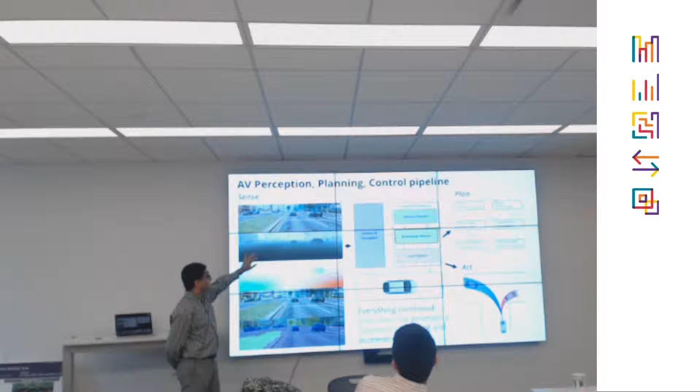If you look at how these autonomous vehicles actually work, they have sensors, and they go through this sense, plan, act loop about 20 times per second. In the sense part, they're getting RGB camera data, depth sensor data for how far objects are, optical flow data like your Xbox Kinect, and object detection data. Then they're doing semantic segmentation, saying this is the drivable surface, these are surfaces you can't drive on, and classifying objects, everything.

So all of this is basically getting streamed frame by frame on the perception sensors and perception layer, and then it's fed to the planner. A mission planner is like going from Philadelphia to Manhattan: use Google Maps, take NJ Transit, come here. So that's a long-term planner.

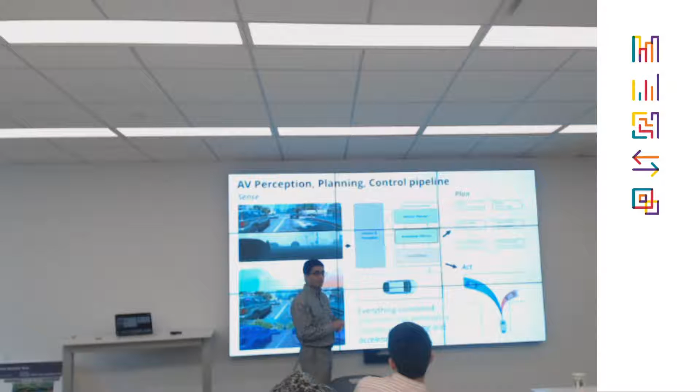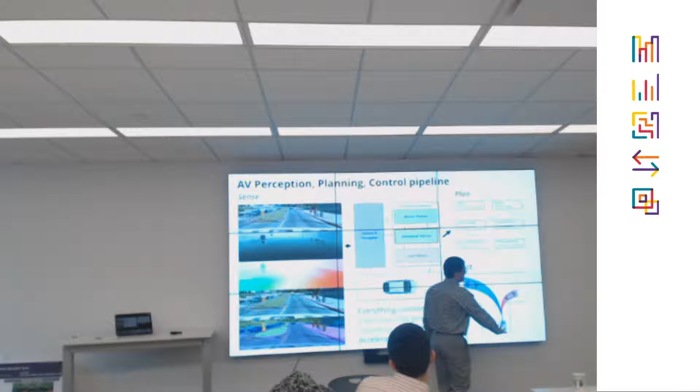The behavioral planner is saying, okay, if I want to go from Manhattan back to Philadelphia, I need to get onto I-95 South. In order to do that, I need to take this exit to get onto the Lincoln Tunnel. It's deciding a discrete decision: take this exit now. And in order to take this exit, the local planner, just looking ahead maybe the next 100 milliseconds, decides these are the possible trajectories you can use. Pick the trajectory with the best cost metric for you.

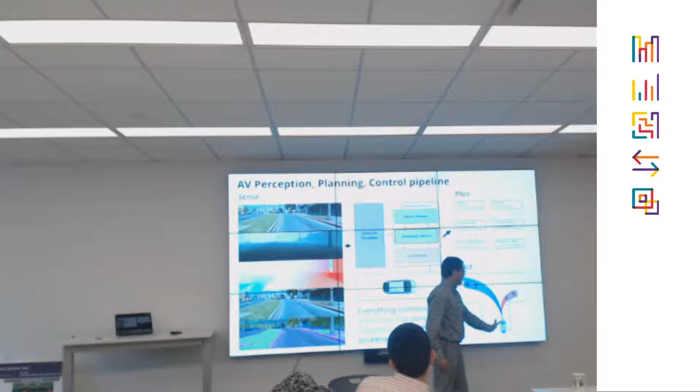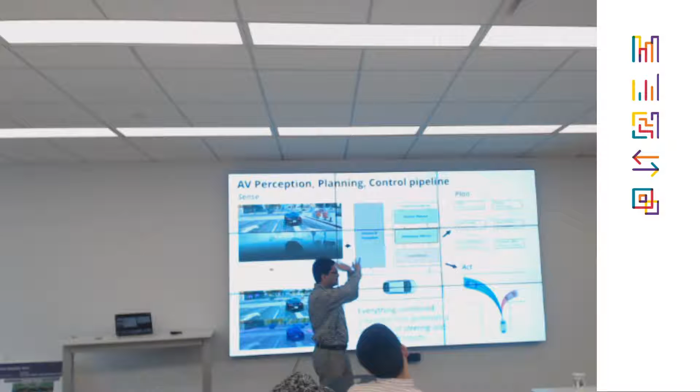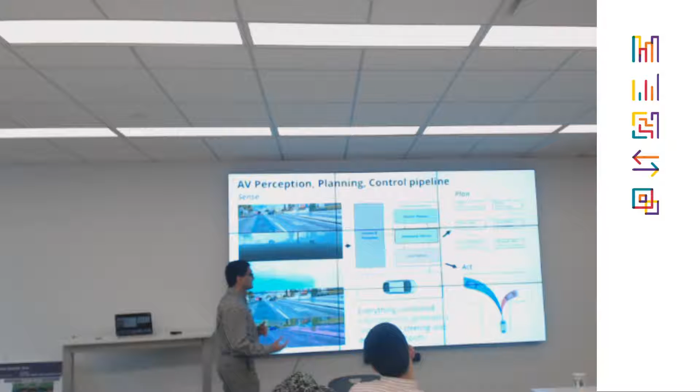And then you need to follow that trajectory with the control. The control is just your steering angle, acceleration, and brake. That's it — all of this comes down to steering and acceleration inputs. So the planning is trying to decide what to do in each scenario, and it's a discrete decision being made there. So we have this decision maker.

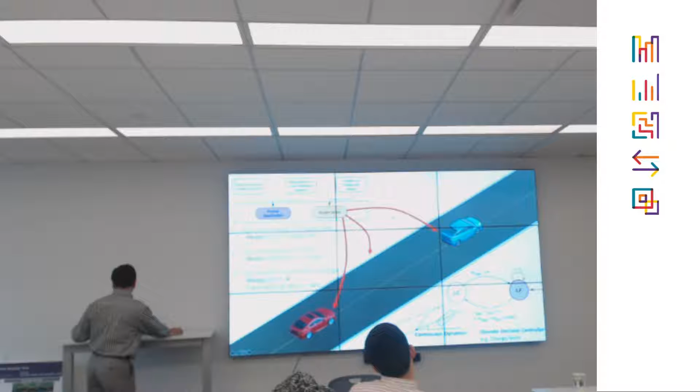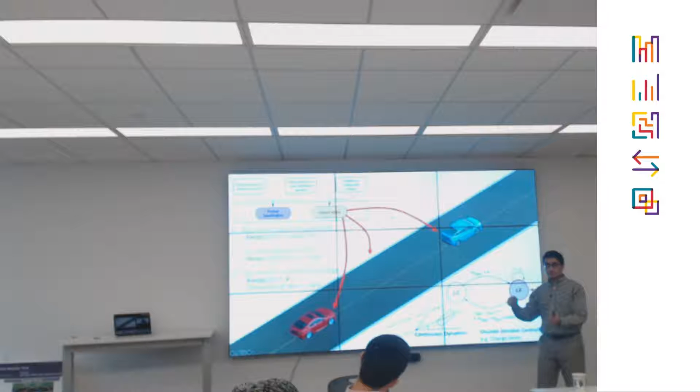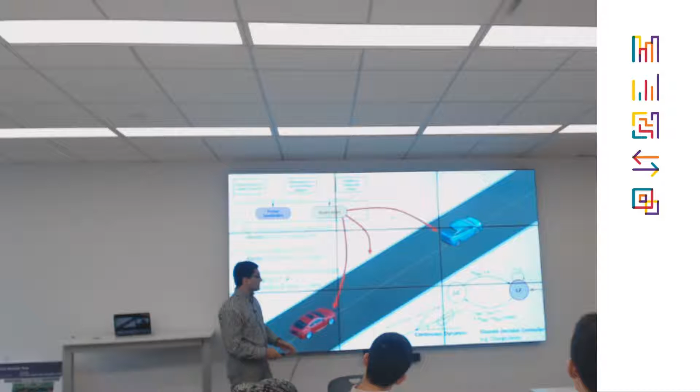As the vehicle is driving along, it has to make decisions — either it's doing a lane follow, repeating through that, or it goes through a lane change, deciding when to make a lane change under certain conditions. That's a discrete decision. This vehicle also has continuous dynamics: it has its own steering angle range, its own inertia, and the control system can't make it do a 90-degree turn. So it has its own continuous dynamical constraints you have to take into account.

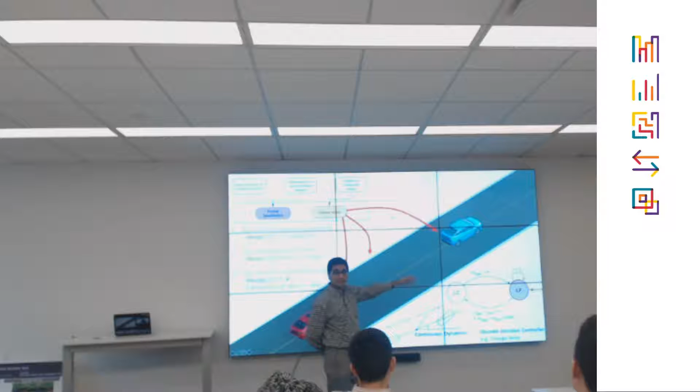But then there are also different rules for safety or traffic — it has to maintain a speed limit, maintain a buffer, has an objective to get into the left lane and make an exit from there, and so on. So all of these have to be captured in some model now. And as you can imagine, that model is going to become quite big and unwieldy.

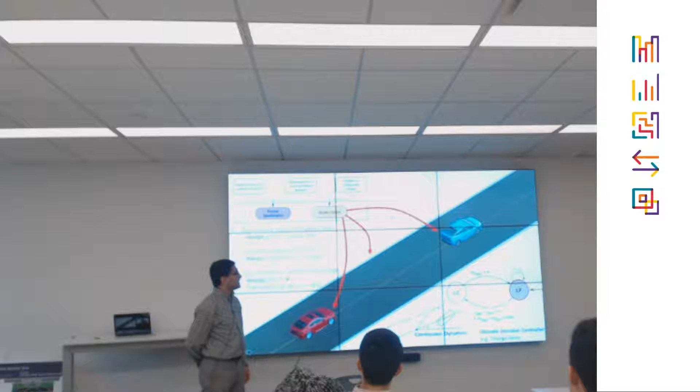For example, if this vehicle is trying to make an entry onto the highway, that's a pretty risky entry, so it has certain rules: if it slips, it recovers in 3 seconds, stays within lane markers, maintains a minimum distance. All these have to be encoded into a useful model for the system. But now, you can model all you like — in reality, things are always going to deviate from that.

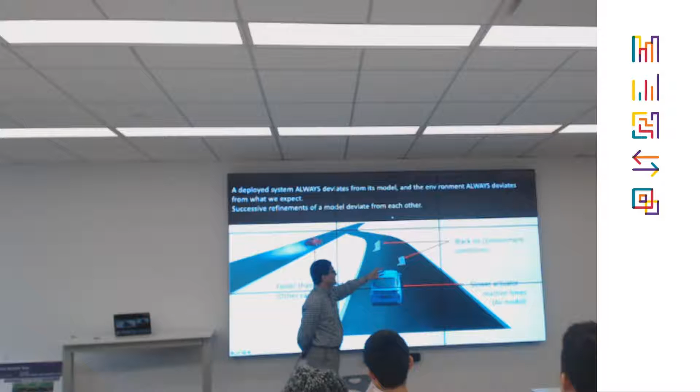The actuators on this vehicle, you could have modeled them, but they are slower than you modeled in reality. The road it's driving on could have black ice, and the vehicle skids, but you just can't model reality in totality. The other agents not in our control could be like Boston drivers, more aggressive than you modeled them to be.

But how do you handle all these deviations from your model? If the car was supposed to take this trajectory, but it skidded, went off, but recovered in time, and now it's entering the on-ramp with a different angle and a different speed or velocity, is that unsafe? It did do what it's supposed to do, but not exactly according to that original plan.

So then what is safe and what is unsafe? How do we sort of go between this binary? Do we look at each case? Do we look at how things are deviating from our model? So is this unsafe? These are pretty close, it's a pretty aggressive exit over here. And is this more unsafe as it gets closer to the other vehicle?

So we have to think of safety not as a binary, but more as a continuum, a spectrum of safety, rather than just safe and unsafe. We need some sort of quantitative continuous measure of safety, because these situations of near accidents or almost accidents or things leading to an accident all have to be quantified within that framework.

This forces us to refine our question from does the autonomous vehicle satisfy its design requirements for safety, to how robustly or how well does it satisfy these requirements, because you're operating across a range of different conditions, road topologies, weather conditions, and other driver behavior.

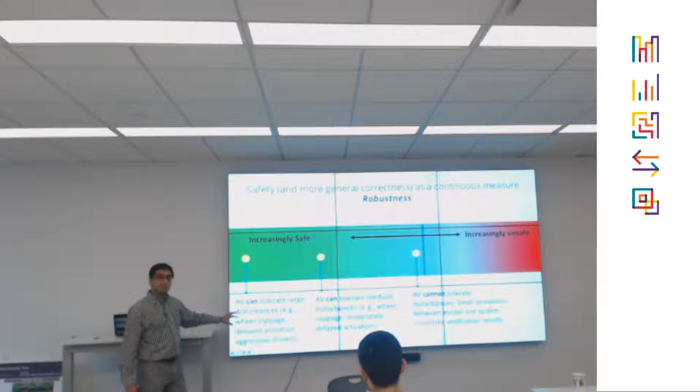So we want to look at this on a continuous scale of safety where we quantify it into a metric called robustness, where if you have a model of the world and anything that deviates too much from that model invalidates the model, and invalidates any verification results you have. A model that can be more robust means it can tolerate a large amount of disturbances, large variations in actuation, in other agents, in the drivability of the vehicle. That's a much more robust model - it can tolerate so much more deviation.

So many of y'all would have heard of this Tesla accident that happened back in the summer of 2016, where a truck trailer was making a turn, and this oncoming car driving in autopilot could see the truck from very far away, but it just went through it. It went underneath, and in autopilot mode, it went off the road, broke through a fence, hit a power pole, and fell into a ditch. I'm not against Tesla or anything, it's just that they have the most examples, so it's not like we're picking on them.

I mean, who else do we pick on? GM is just disbanding half of its plans on electric vehicles, so I think people are struggling to get into that.

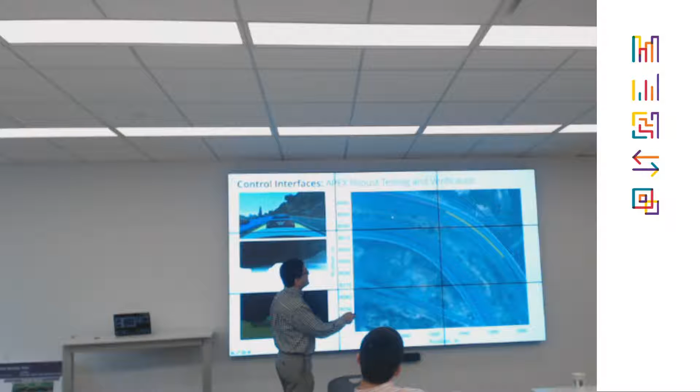For example, here is a very sharp high-speed turn where the vehicle could be going out of control, and we can drive this car now getting frames frame by frame on a machine, plugged into a third party's perception, planning, control system—almost like mounting a car and making it wear VR goggles, driving through the game using its own pipeline.

In fact, in this case, the simulated world was running in Philadelphia while the whole pipeline was running in Boston, sending frames across and driving this car step by step.

We can even incorporate end-to-end machine learning using convolutional neural networks to take these frames and determine what steering angle and acceleration you would have, running this for hundreds of thousands of tests. This is one of the tests that gets returned—a test where the vehicle failed to satisfy its safety constraints, meaning the vehicle really crashed.

The whole point is that we can go through as many of these crashes as we want before the vehicle gets on the road, because we are running these tests for the vehicle at a very large scale.

But we are not doing this just exhaustively, or in a simple Monte Carlo fashion. We have a specific way of identifying this in a gradient descent fashion.

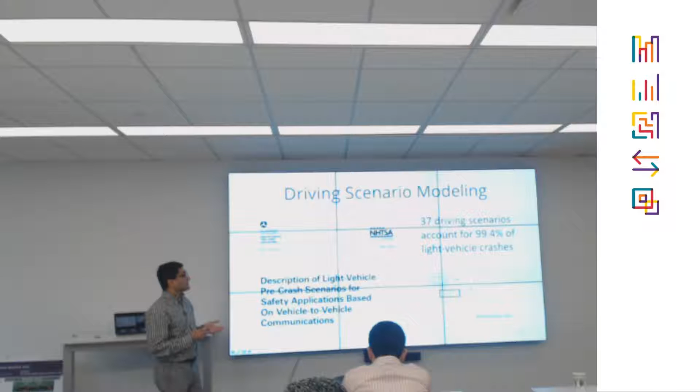Like merges, overtakes, T-junctions, roundabouts, exits, all of that. We can run these with different initialization points and exhaustively search across a range of distributions. This is one example of a vehicle trying to make an exit, and then it spins out of control.

The point is that this is not manually made by anybody—it's something returned by the search engine saying, here's a violation. This vehicle failed to satisfy its objective of getting out of the exit, and then we can go and analyze that.

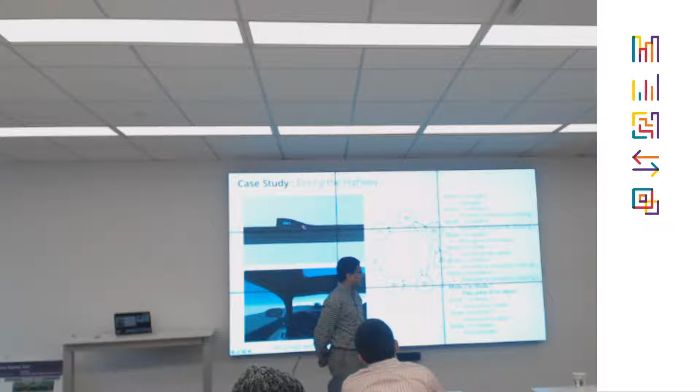So when we analyze this, we can look at the decision tree of how the vehicle is making its decisions, and then we can interpret and point out that this vehicle moved from its highway speed controller to its exit controller a little too late, and therefore it was going in too hot. But that is our interpretation. The point is this issue could be with other vehicles, with the weather, with the road network topology itself, with the dynamics of the vehicle, with the decision making of the vehicle. It could be with any part of this model, and we can identify that portion.

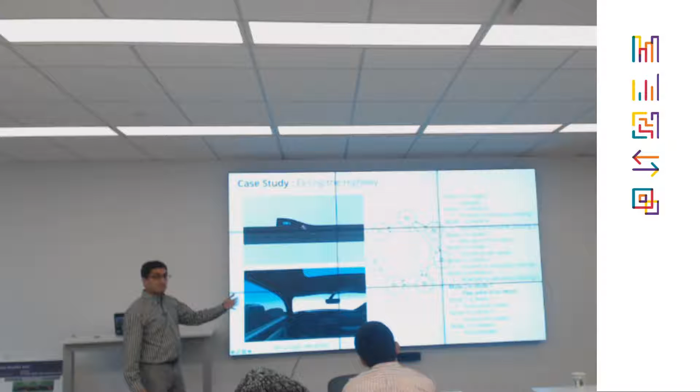The way this search engine works now is that it returns a robustness value. Any value that is very negative, you can click on, and it will procedurally generate a video of that scenario.

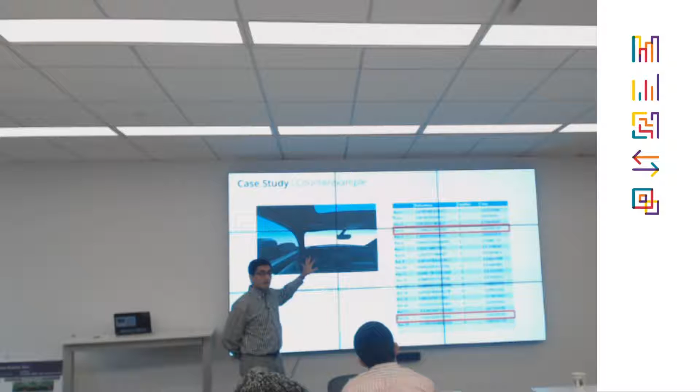You can actually see that, because our partners in Toyota at that time were like, we need to see a playback of a failure. And then we had a different problem with them, that every time we showed them a failure, they would say, oh, okay, we understood that, now it's very obvious. Show us something that's not obvious. This became a really difficult thing, that once you explain something to someone, it becomes obvious. Then how do you show them something not obvious? Every time we explain it, they say, oh, that's obvious now. So then what's not obvious?

So then we can take this vehicle and run it in more high fidelity simulations. This is looking at a local planner, which is looking about 100 milliseconds ahead. These are all the possible splines, and it is picking this spline over here to follow this line across. And then we test our vehicle.

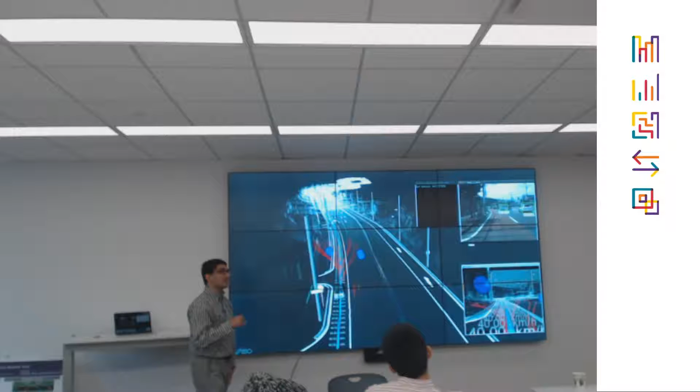This is an example of a test of a real vehicle in Nagoya, Japan, with one of our partners, where we rented out a lane and drove it to test out this local planner at that point. So it's going from this simulated land to high fidelity simulations with dynamics into real vehicles, where we can gradually get to certain safety benchmarks as this vehicle is getting onto the road.

So in terms of how we do this: we use this approach called metric temporal logic to capture all of these questions, all of this dynamics.

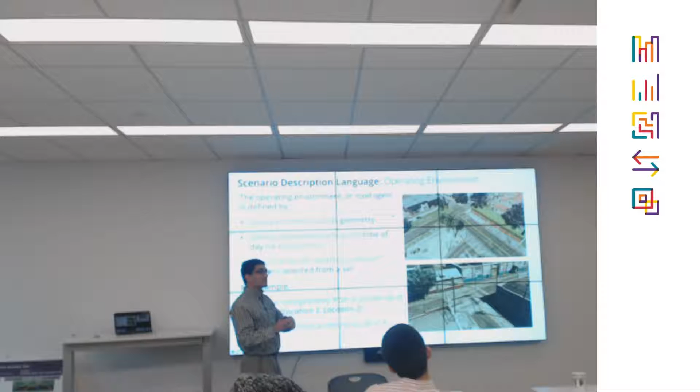We can set the lighting conditions to be within a range. We can set the initial positions of the vehicles. We can set the initial speeds of the vehicles, all within these ranges. Now we're going to run these simulations and search through under what conditions this vehicle starts to violate any of its specifications. We can choose all of these settings within some ranges, and a set of actions also within a range of actions.

These are kind of initial points of where the vehicles could have started, and there would be initial velocities of these vehicles. So for a T-junction case, we can specify that we want to search across all of these ranges for each of these dimensions, in terms of how the other agents work, how we work, and what is the goal of the scenario. I'm going to capture all of that in this logic.

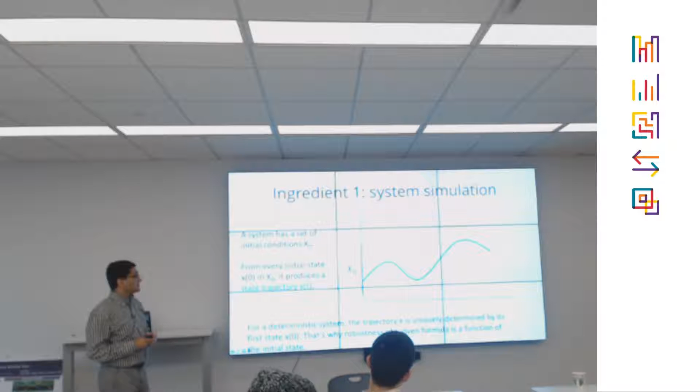What this logic is essentially trying to do, say for example, we are looking at the distance to another vehicle. If we are getting closer to the other vehicle, this is one simulation run where we are non-deterministically choosing a point within that range to initialize that run. So it could be the other vehicle's speed and our vehicle's speed at the T junction, and then we run the simulation through that. This is the closest it comes to that other vehicle.

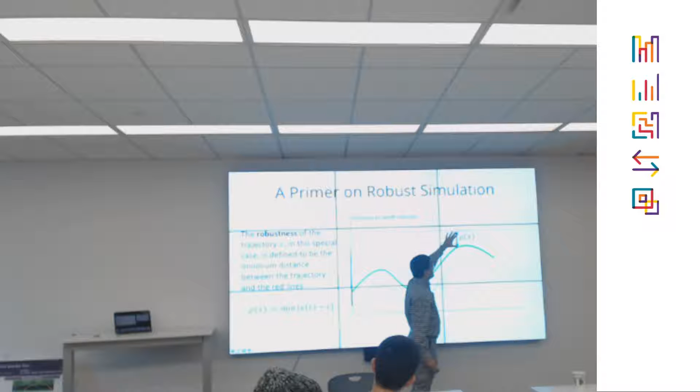So we basically treat this tube of the distance as the robustness value. This means that if this scenario was actually disturbed by this much, that is the amount of disturbance we can handle until the safety specification is violated. And if we have another simulation run, shown as this blue line, we can see that it's getting closer, so it actually has a lower robustness.

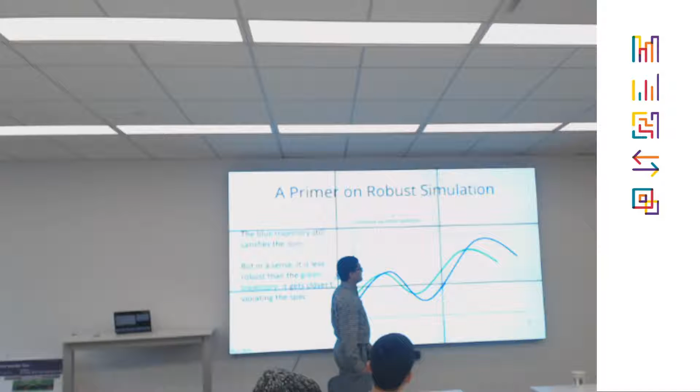So anything that is within this robustness tube, and all simulations that run within this robustness tube, can basically be eliminated, saying that they have this amount of quantified robustness before it violates the safety constraint. So we can say all of that can be treated as safe.

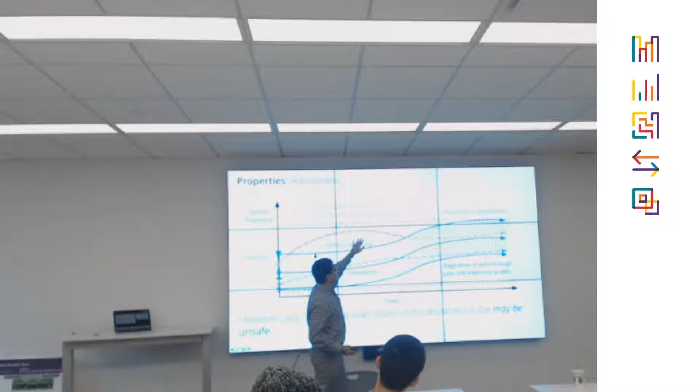Anything that comes out of this robustness tube, whether it goes back in or whether it crosses that safety constraint, is something we cannot determine with this testing method. So anything within this tube, we can eliminate. We can just say this is safe, or this is totally unsafe if it's violating. But what we cannot answer is what happens to things that get out of this tube and may or may not come back in.

What I can't determine with testing are these corner cases or boundary problems, where the robustness is low and getting close to the unsafe situation, but testing alone can't give a clear answer. So we run that through Reachability Analysis, which is basically a formal verification tool that can exhaustively search that space. But those tools can only work with very small ranges and smaller problem sizes, so we're essentially eliminating most of the search space and only determining the boundary of safe and unsafe for the T-junction case or the roundabout.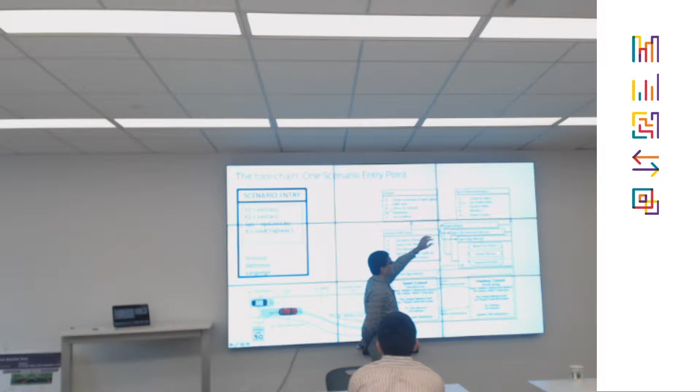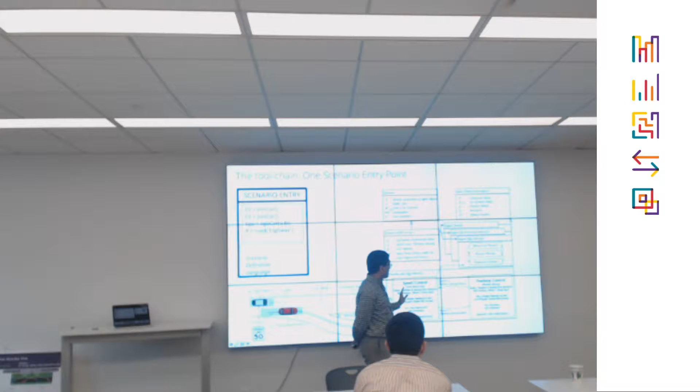The way we do this is with a tool chain where we have a scenario definition language to describe the scenario: the topology, the traffic laws, the vehicles in discrete and continuous states, the vehicle planners, and how the vehicle is actually behaving -- for a particular scenario, how it's going from speed, headway control, speed control. All of that is described in a hybrid model of the vehicle, for say, an exit scenario.

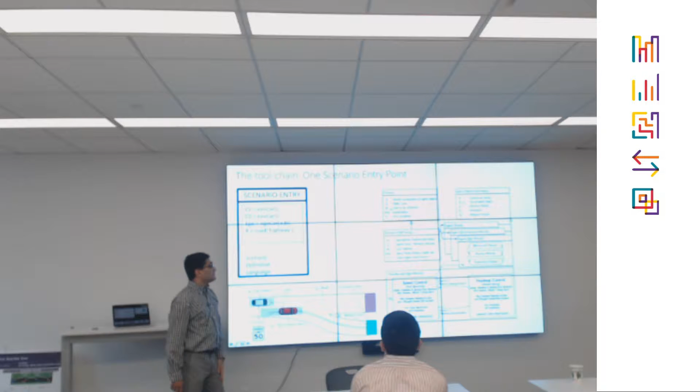This is all very easily specified with this scenario definition language, and then we can start to test this scenario using our testing engine, which goes through rounds finding the place with the lowest robustness. The cases with very low robustness, which we cannot eliminate with testing, we send to our verification engine, which exhaustively looks at just that small range of problems, allowing us to eliminate even those smaller issues and clearly identify unsafe behavior.

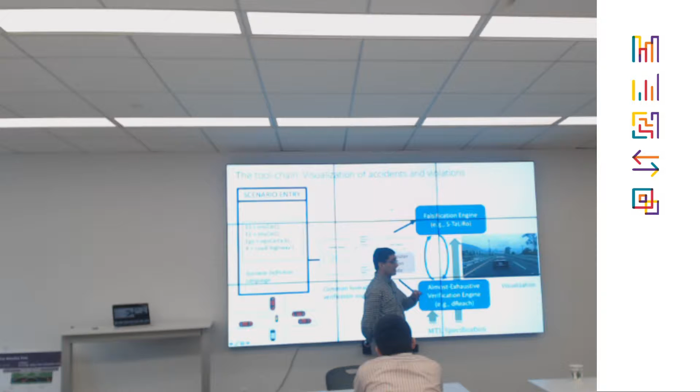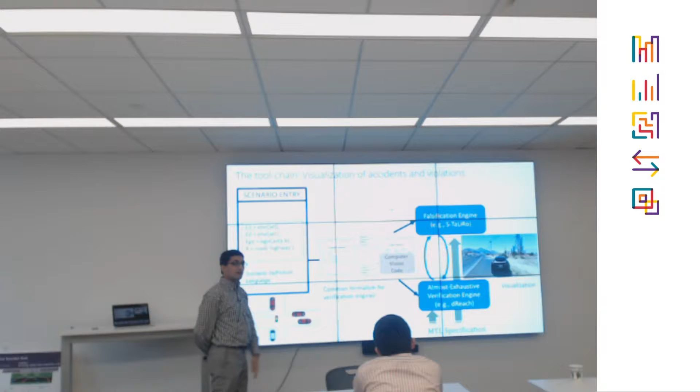We can introduce computer vision code as part of our testing tool, and black box systems within the testing. So you can basically plug in off-the-shelf or any commercial vehicle system into this tool chain to be able to capture that.

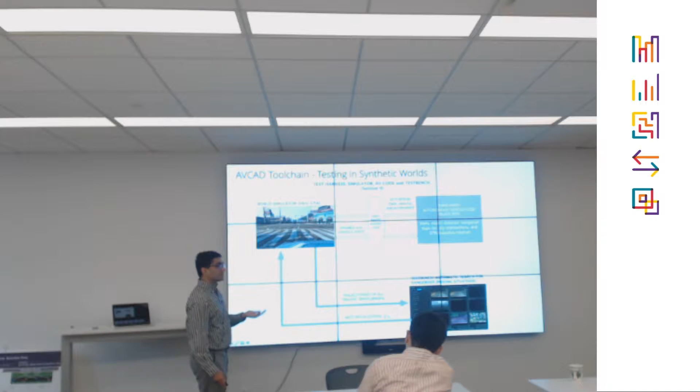So this allows us to run through this, and that's the engine sitting behind it. You may not have understood more than half of what I was saying in terms of the logic, but essentially this is some way of specifying the behavior of all these vehicles. It's a behavioral specification language, a formal language for specifying that, which can then be used in these verification engine tools to eliminate or determine safe and unsafe cases very explicitly.

So let's look at using the simulated world. You'll say, well, it's different from driving in the real world, of course. But nowadays with simulated worlds, it's very hard to say what's real and what's simulated, and that one is simulated right on top.

If you look at the distribution of spatial information and colorfulness across these different actual real world image datasets, the blue one behind is our simulated world dataset, and it's basically within the same distribution. In terms of the performance of the algorithms using the simulated dataset, they actually perform slightly worse with the simulated data than with the real data.

So our results are a little conservative in that sense, and it is a first step to safety. It's not saying that a car is going to be totally safe as soon as it gets on the road because it drove really well in the simulated world. Lots of studies have shown that training on both simulated and real driving is better than training on just real driving only or simulated driving only. So you have to complement that.

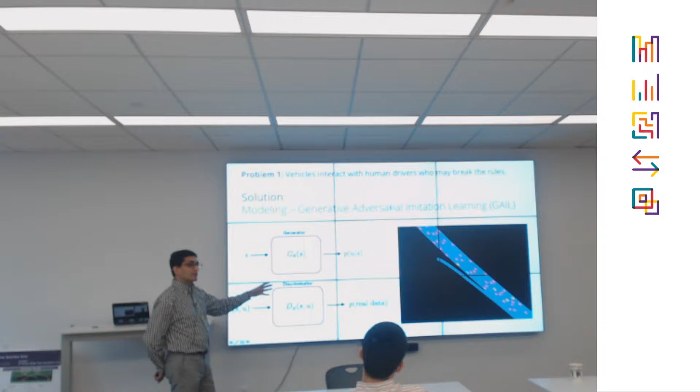So we start to use DOT cameras now. We can take DOT cameras, and from these cameras we can extract and do object detection and identification of the vehicles, and then play this back in a simulator. I took that from the video, made it into a simulation, and we can extract the driving behavior from that actual drive and use it to train a naturalistic driver in that environment. But I'm not just training another driver - I want to replace some of these cars with my AVs.

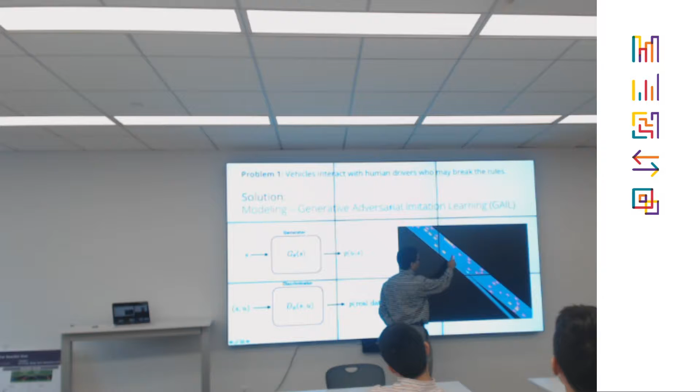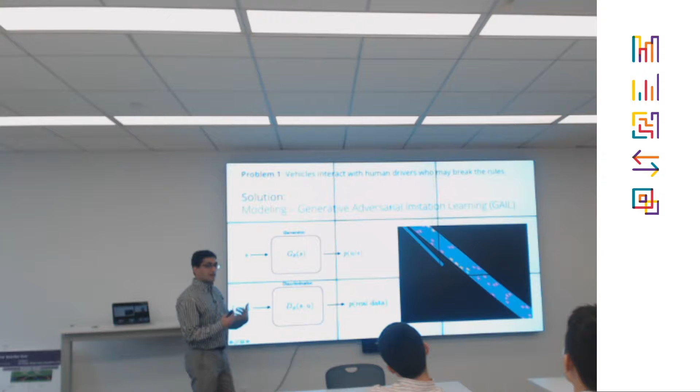You can see that AV is driving a little risky over there, but it's reflecting some naturalistic driving behavior, using its LiDARs and its perception engine to drive pretty similar to how these vehicles are driving in that T-junction case.

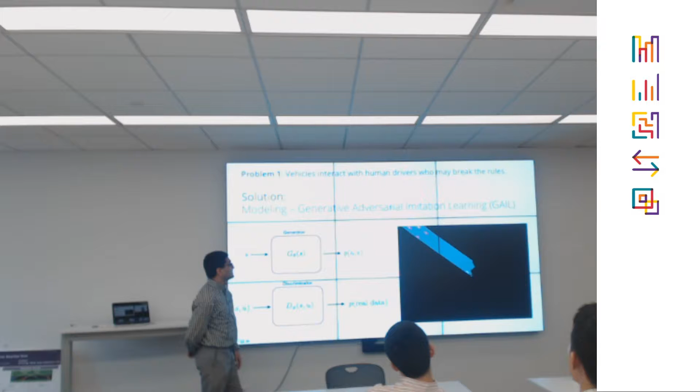We are using this approach called imitation learning. It is an approach where it is basically getting trained from many different examples. But then we also run it through a discriminator which eliminates non-naturalistic driving behavior.

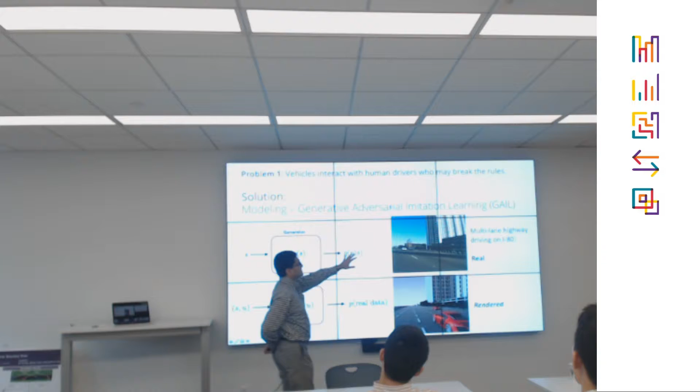So for that same highway, if this is a real image of that area, we can run this in our rendered system. What we really want to do now is get naturalistic driving behavior with an AV within that same driving scenario, and then see the distribution of the naturalistic driving behavior - where are the aggressive drivers on the tails of the distribution.

So we are really trying to do this rare event simulation and capture the most aggressive driving scenarios. Then I can play this back and run experiments by shifting the mean of where I'm operating within that distribution toward more aggressiveness.

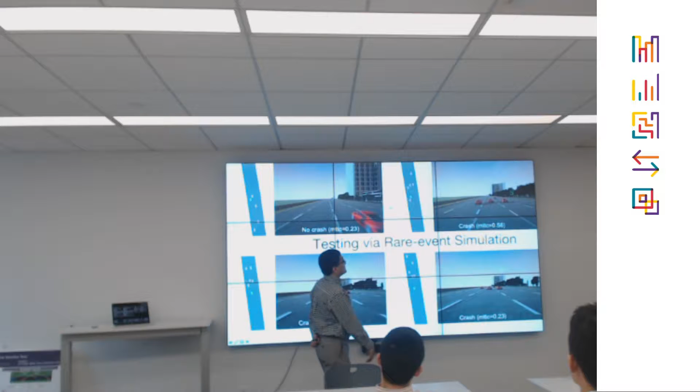That helps me capture situations - there are no-crash situations, or there's a rear-end crash, a side-swipe crash, and different kinds of crashes. Essentially, all the other vehicles are following the naturalistic driving behavior we trained on that situation, and our AV is driving through the same situation, but we get more aggressive traffic by changing the mean.

And that allows us to now speed up the capture of these unsafe conditions from 2 to 20 times faster than Monte Carlo methods, and this is a very scalable approach. So the idea is, can we now replicate this for all DOT cameras, and then see how AVs will actually perform at a city scale, rural scale, and so on.

So we use a lot of models, but we have to be careful in terms of how we use them and where we use them a lot. And then we also build real cars, where we want a lot of our students to know how the whole system actually works. While many companies and universities have these cars, it's really important that everyone coming through our program can actually know how to build an AV.

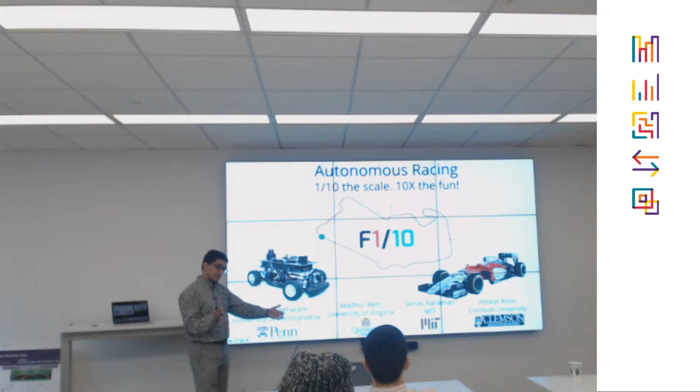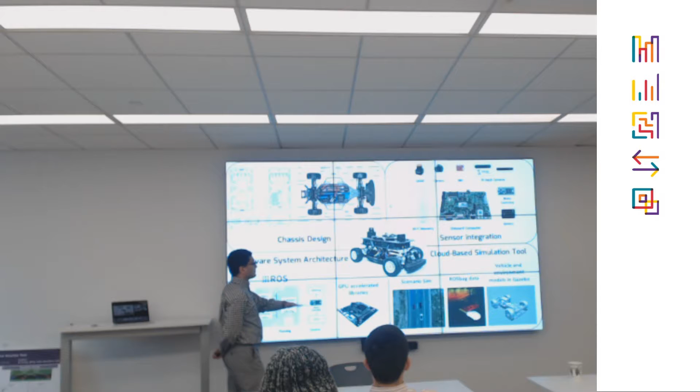Something fun that we do at Penn is also we build these F1/10 racing cars - Formula One racing cars, 1/10th the scale, but 10 times the fun. These are small cars, but they're fully autonomous, and we basically teach everyone how to build, drive, and race these systems, from perception, planning, control.

And we have online lectures. Everything is open source - on this F1/10th website you can just go there if you're interested in that. I think this is probably a good time to just put the audio on.

So this is one example over here where these cars are now running their sensors, actuators, with LiDARs, depth sensors, all on board. There is no laptop involved. It's making all of its decisions on board. This shows you the LiDAR map of how it's making its way forward, doing overtakes.

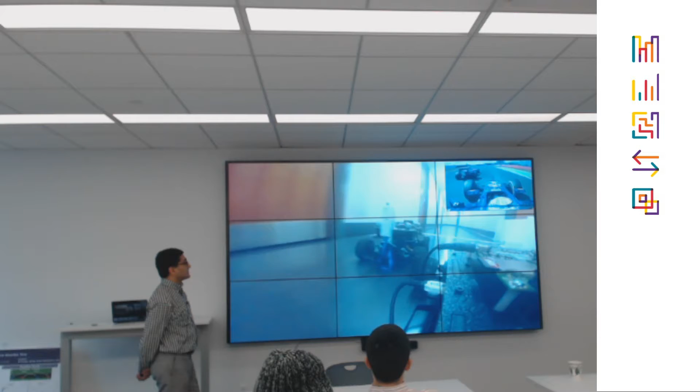Here the idea is that the objective is to go beyond making the vehicle as safe as possible, but to really be pushing the boundaries to the limits of control and perception.

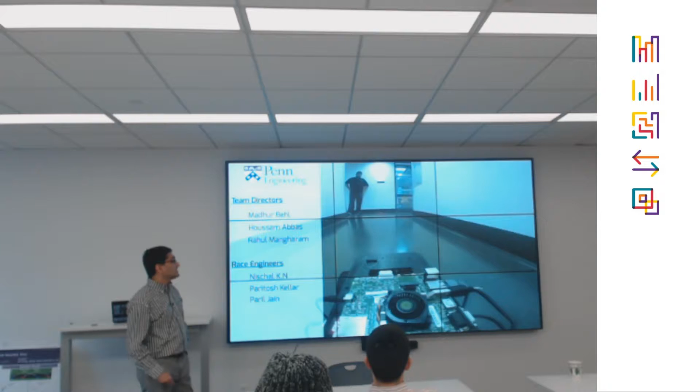As part of our work, every year we have two of these Grand Prix competitions. This was one in April that we had as part of the Cyber Physical Systems Week, where we have groups from all over the world come in based on the same reference platform. So it's not like you can spend more money to get a better - this is actually a sophomore undergrad student.

So the whole idea here is how do we actually build this department of autonomy - not just with vehicles, today it's vehicles, but autonomy in more general, and to learn about perception, planning, control. This is also a battle of algorithms, where they all have the same reference car, and then they're trying to race it head to head with other teams.

I'll just forward this a little bit - so this is a vehicle that's making all of its decisions on board.

So we don't have much time for the second part, but I'll give a very brief overview of another project that we work on, building this urban air traffic controller for different drones. I'll give you just the 2-3 minute version of it.

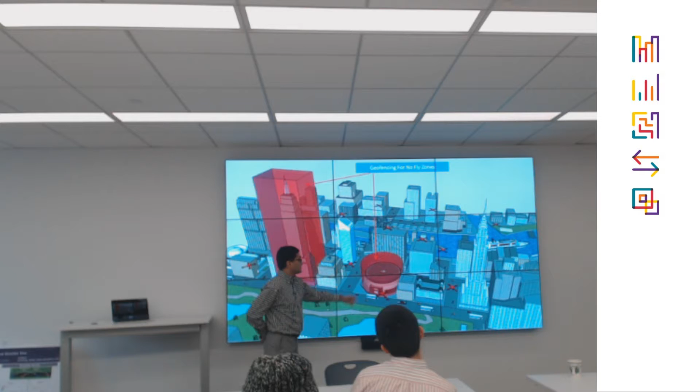But essentially, suppose you have in a city you want to be able to fly 500 plus drones over Manhattan - how do you organize that airspace? Say you want to make sure there are some geofenced zones with no-fly zones, and certain drones have certain pathways they want to go around because they want to patrol those areas, or they want to extract some information.

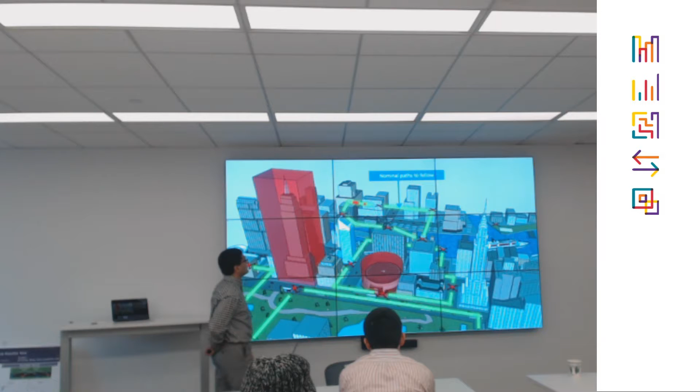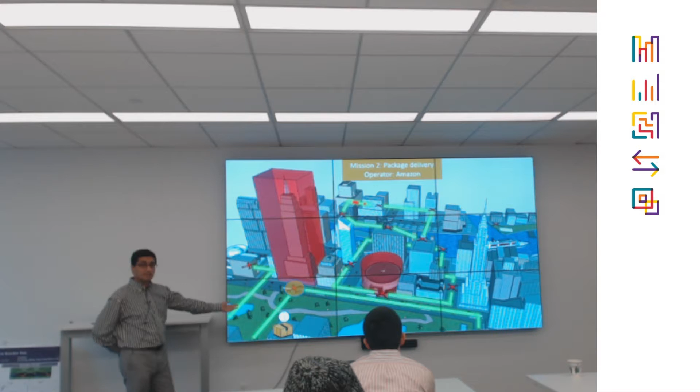Say AT&T wants to monitor some signals in certain spaces at certain times, and Amazon wants to do some delivery at a certain point. Drones, by the way, are the worst platform for deliveries, so never use that example, because they just cannot lift weight. They're not designed for that, the physics is against it. So whatever Amazon says about drones delivering goods is just a PR stunt.

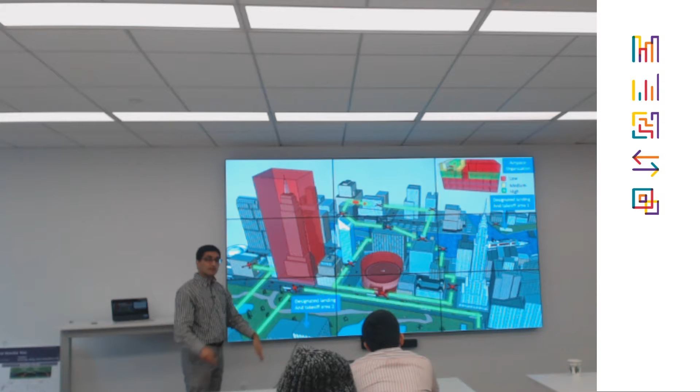So how do you organize this airspace? In that organized airspace, how do you make sure these drones can satisfy spatial constraints, meaning get from A to B, temporal constraints, get there within a certain time window, and reactive constraints, which is how close they get to other drones. The goal of this project is to look at these multi-drone, multi-mission systems and automatically synthesize plans, trajectories, and path waypoints for all of these drones to satisfy all of these missions.

So say they have to satisfy spatial constraints, respect geofences, and maintain minimum inter-drone distance. They have to complete their mission within a certain time window, then move on to the next part of the mission. They have to do this in an energy efficient manner, and also stay within these time windows for each part of the mission.

So you want to make sure that if one set of drones wants to patrol these two regions, and another set of drones has to go from the base to do a delivery, and they have some unsafe region they have to avoid, how do we organize many of these drones to do that?

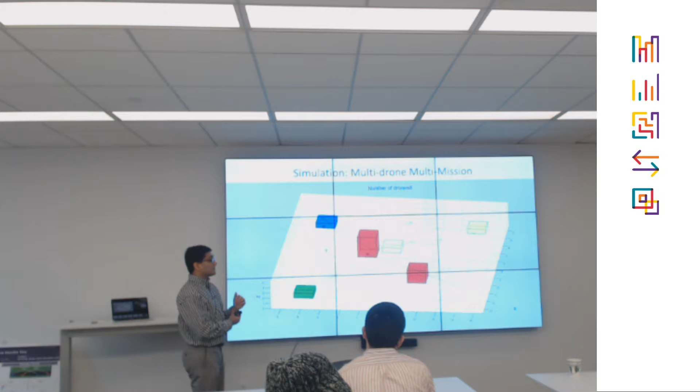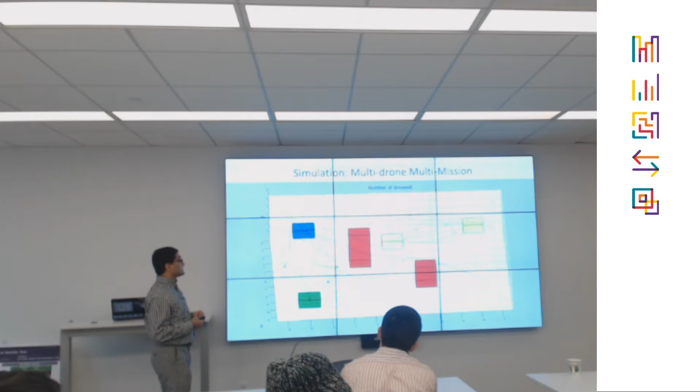So this is an example of how we can organize all of these drones to satisfy their spatial, temporal, and reactive mission goals, and ensure they can finish in time, while determining what kind of flight paths they should be taking. And at the same time, things can go wrong once you decide what to do, so how do they recover from that?

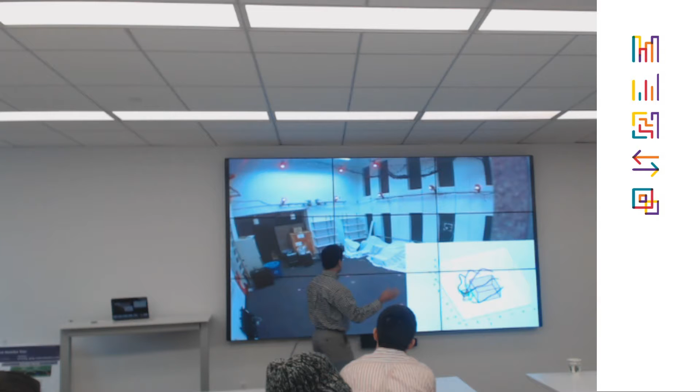This is actually them all working within this lab to do that same kind of mission for real. This is running on board all these drones for different types of missions. It's hard to see in this resolution, but essentially they are all trying to get from different starting points into this goal region without crashing into each other. When they come into the goal region, they move a little bit out and make room for each other.

But the whole point is that these missions can now be specified at a very high level. On an iPad, you just draw the mission, do patrolling, do this delivery, etc., and say deliver a package to this location in the next 5 to 10 minutes. Then it has a list of scenarios it's going to go through: take off, hover, navigate through that, and then it has to return to base, with some set safety parameters.

The idea is, how do we make sure they have maximum robustness, the same as before, so they can handle a lot of disturbances, whether it's wind, a drone falling from the sky because it ran out of battery or had a malfunction, or some rogue nodes coming through the network. This is a very robust system.

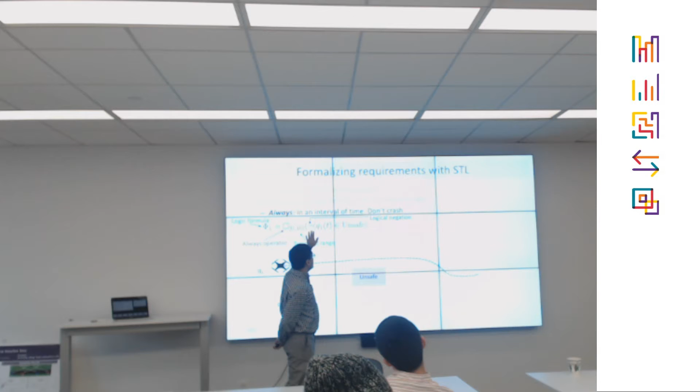This is an always operator saying that through the lifetime of this mission, this zone should never get reached. There's a temporal range where the lifetime is from 0 to 10 time units, and a logical negation meaning you should never get into that region. This is an atomic proposition for the unsafe region that drone 1 should satisfy. Similarly for drone 2, we can AND that condition together with a logical AND.

And then we can say that these drones should also keep some minimum separation between themselves, that the distance, the norm 2, should be more than this distance over here.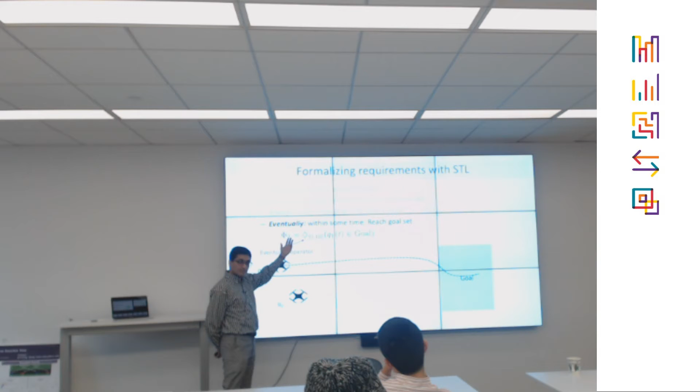So then we can say eventually these drones should reach that goal, and this is an eventually operator. This symbol is basically saying that within this time region they need to get to that goal. And then same thing for drone 2, it should get to that goal, and then you would use an until operator.

This could also imply something, that once it gets to its goal, it's dropping off a package. So if-then-else conditions can be captured this way, and this becomes our property: these drones should avoid this region, get to this goal within this time, maintain some minimum speed until they reach the goal, and then they can stop there. We can concatenate all of these properties together.

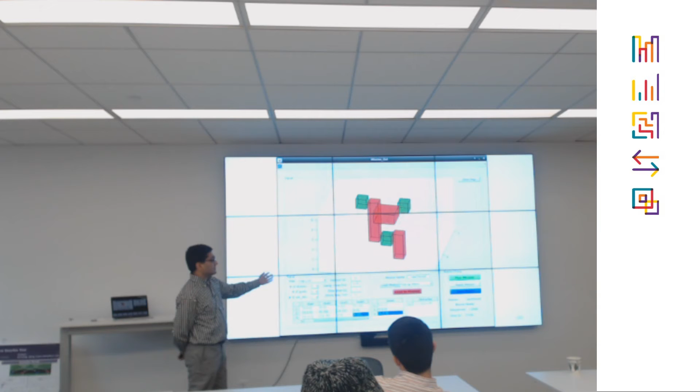This is all very logical and abstract, but since it's based on a certain semantics of this logic, we can use that to synthesize actual trajectories from it. This is the tool we then use to generate all of these missions.

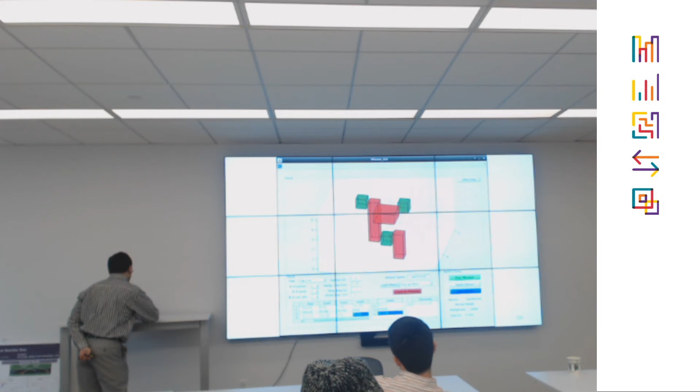I'll skip forward to the last part where these missions are finally planned. Essentially this system takes all of these multi-drone missions, whether it's for agricultural stuff or surveillance, whatnot. We do not work on any defense projects, so it's all just peaceful projects.

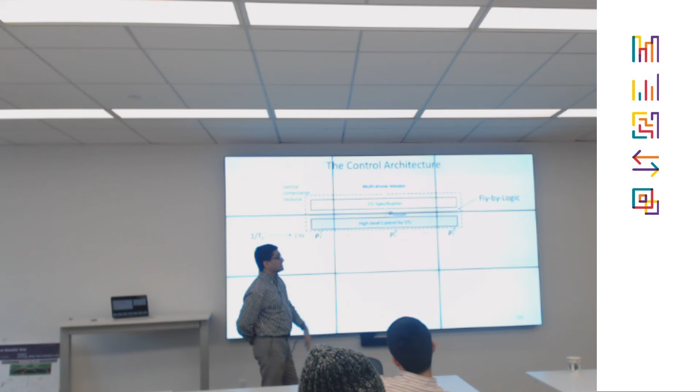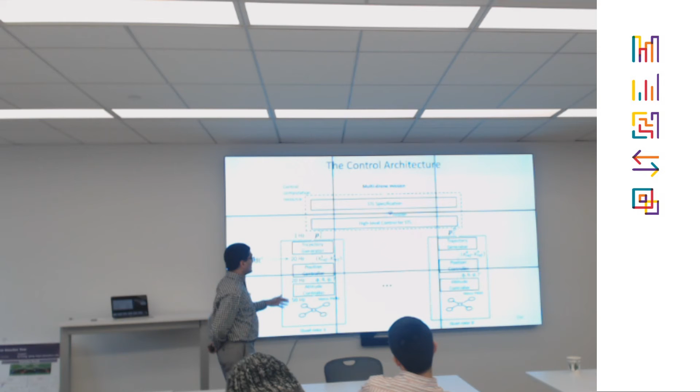That gets mapped automatically to a specification, and from this specification it takes into account the control constraints, because the drones cannot fly in certain ways, and they have to go into smooth splines, so they satisfy this continuous control capability to then generate the control actions along a certain set of waypoints.

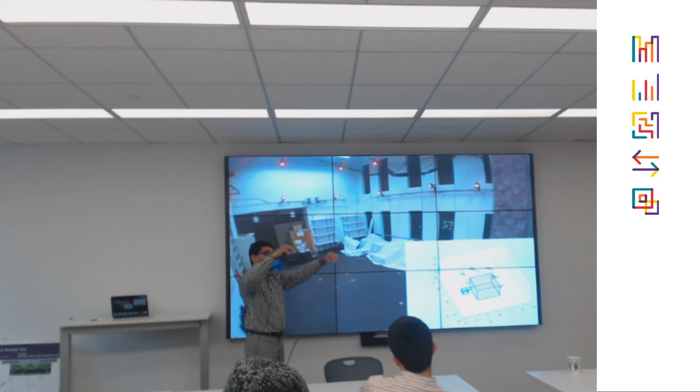Essentially the output of our tool gives a certain set of waypoints for all of these drones to take at different velocities, and they satisfy getting from waypoint to waypoint with their control constraints, and automatically we can generate these complex missions.

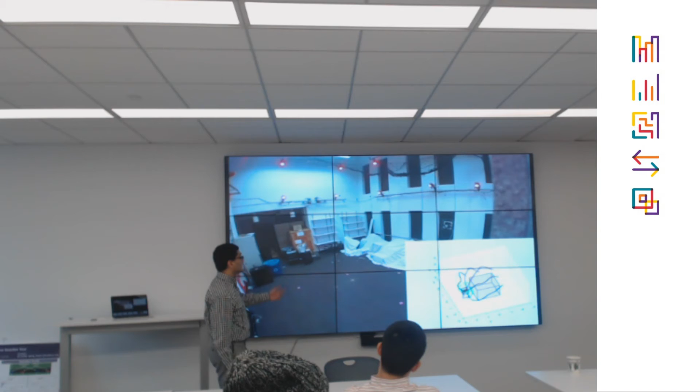We can do this in a very efficient manner, where we can do it online for about half a dozen drones right now, and in a distributed manner we can do this also in a very good way, where we can maintain safety, maximize robustness to say whatever disturbances the drones go through, this is a pathway that maximizes the robustness, and we can do this calculation in an online manner now for a fleet of drones.

So this is essentially like combining controls and formal methods to work with these physical systems, but at a large scale, to be able to generate mission planning. It's kind of crossing the boundaries of a lot of things, from robotics to formal methods and computer science to capturing dynamics of the system.

The current work is really looking at how do we do this in a very distributed fashion, and where we can replan if there are changes like weather changes, or there are emergency landings happening.

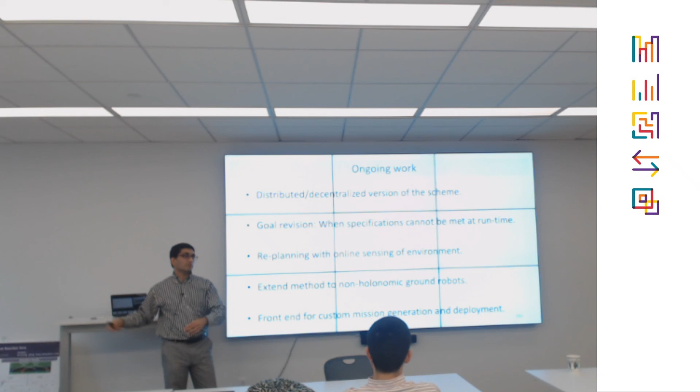Another extension is that we are working with Amazon Robotics to develop robots that are fetching crates and pallets from the docks into their large Kiva-based robotics warehouse systems, which run on a grid like that. So how do we actually navigate and get these bots to come in and out of the warehouse, go around humans, and so on? It's a very messy problem there.

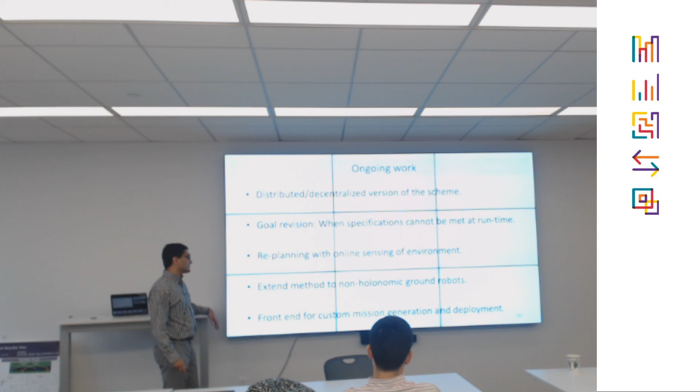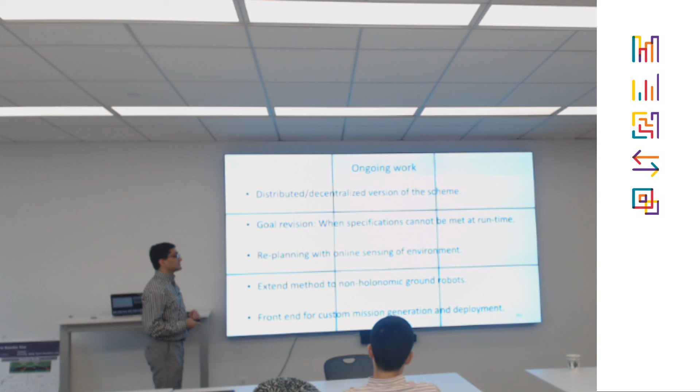And then we have an undergrad group that is actually developing a whole app now that can go end to end, from specifying different missions to flying a dozen drones in that outdoor space that I showed you.

So I'll stop here, and I can take any questions if you have on whatever we spoke here. Thanks.